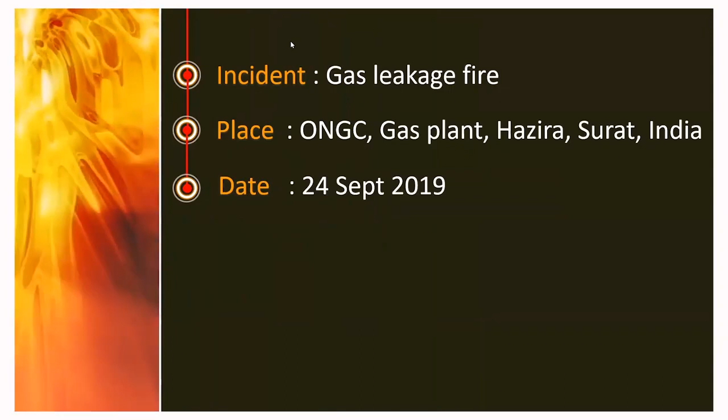It happened on 24th of September 2019 at Hazira. Basically, it was a gas leak and fire at the Hazira facility, Surat. Actually, I worked in a nearby industry for 1 year, so I am very much familiar with the place. It was on 24th of September at night, 3 a.m. There were many such news around about the incident.

So let us talk about PEAR loss. Basically, whenever we are talking about loss, we are used to using this PEAR term: people, environment, asset, and reputation. In the incident report it was not arranged like this, but we tried to map it.

People loss: what they mentioned, there is no injury or any fatality. That is good. Environment loss: they mentioned a few damaged trees, but really it was a huge release and huge dense smoke. That part was not mentioned. So here they only mentioned damage to a few trees.

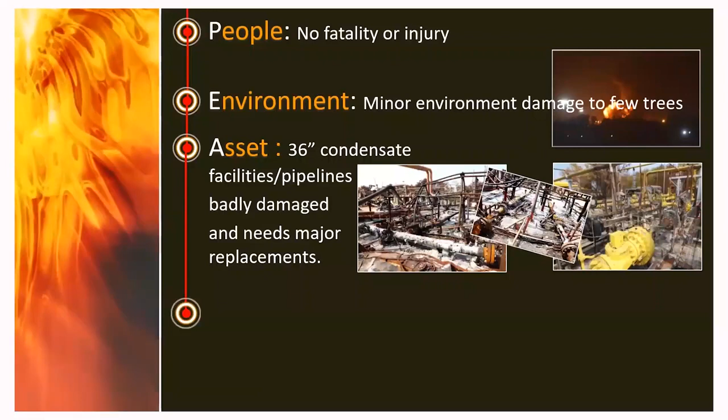Asset damage: you can see from the photograph itself, huge asset damage, production loss, this, that. But as per the report, they mentioned only the 36-inch line, one of the condensate facility lines, was badly damaged and needs replacement.

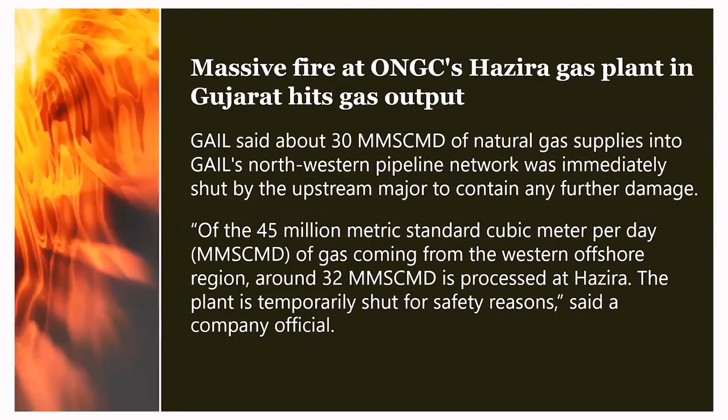Reputation: it became a news headline for all such news channels and newspapers here and there. One of the news headlines talks about 30 million metric standard cubic meters of gas supply to the northwestern region being interrupted because they shut down the plant.

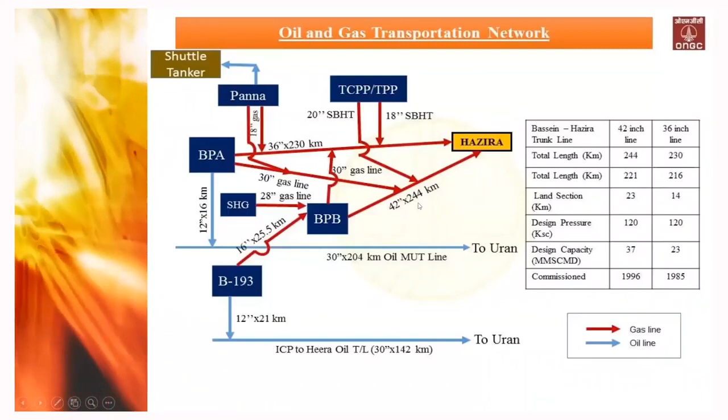Basically they were receiving gas along with condensate, and there is a huge network of such gas. One of the most important aspects: there are two lines, the 36-inch line which is around 230 kilometers long, and the 42-inch line which is around 244 kilometers, coming to the Hazira plant for processing, where the gas is processed in the gas terminal. The gas terminal is nothing but a kind of separation of gas from condensate.

The 36-inch and 42-inch lines were well designed for mixed flow of gas and liquid. In the gas terminal, it is separated through a slug catcher, and then gas is routed through various cleaning units for further distribution. And similarly, condensate is processed and routed for local customers and other finished products.

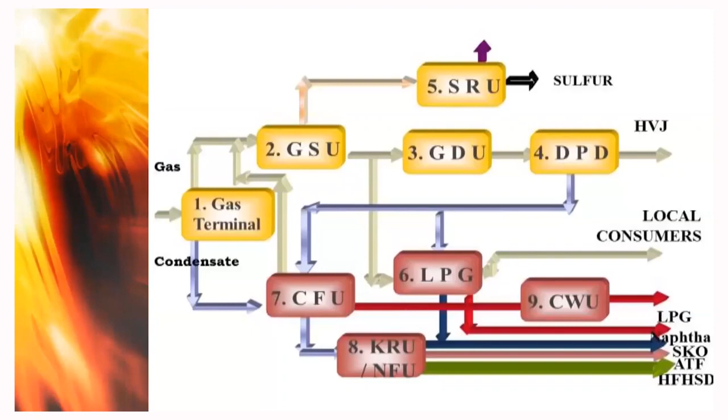We will not talk about the GSU, GDU and all because it is not of much interest, but yes, something happened to this gas terminal. So let us go through this block diagram. I tried to prepare this block diagram based on the description available in the investigation report. So here you can easily understand what is inside and outside.

There are two lines, the 36-inch line and the 42-inch line, coming to this gas terminal for separation. There are two isolation valves for each line, and the other isolation available is called the valve station. For the 36-inch line, the valve station was 1.7 kilometers away from the facility. So it is offsite, and inside there is one valve.

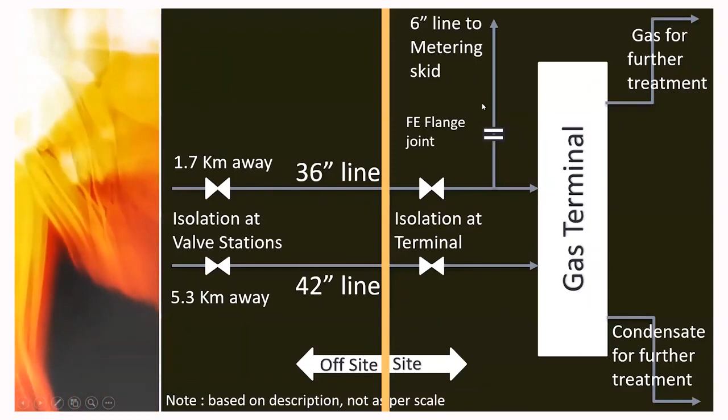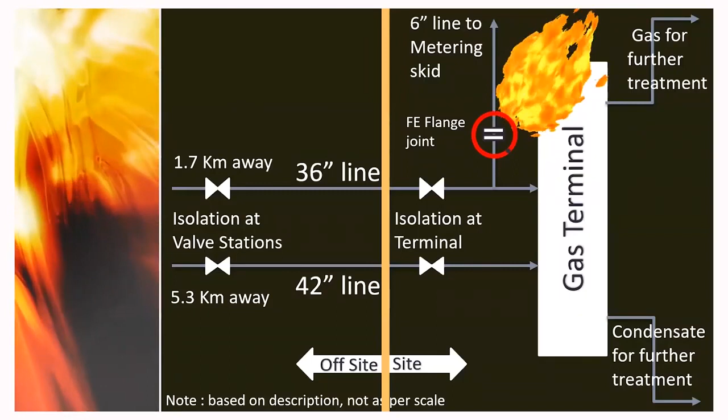Why are we talking about this valve? Because it is one of the points of interest in the discussion. After this valve, there was a connection for the metering skid 6-inch line, and particularly this flange started leaking and then there was fire. So this is the location where the actual leak and fire happened. Again, it is based on my interpretation from the description, but more or less it is matching. So this is all about plant and processes.

Let us go through the incident timeline. What happened at which time? At 2:15, one of the security guards observed noise as well as a vapor cloud from the location, and he informed the main gate control room, LPG control, various control rooms; they have a defined way of communication, so they communicated accordingly. Almost 3 minutes later, the same thing was reported by one more person, and it could also be identified through CCTV.

Around 2 minutes later, they started more communication. So all of them were now communicated. Around 3:04, one of the pressure control valves, which again I could not locate because it is not a 36-inch line valve, something controlling the downstream pressure, was closed. But this valve is not an isolation valve for the particular gas line, which we will talk about later. By almost 3:08 hours, fire took place as per the CCTV footage.

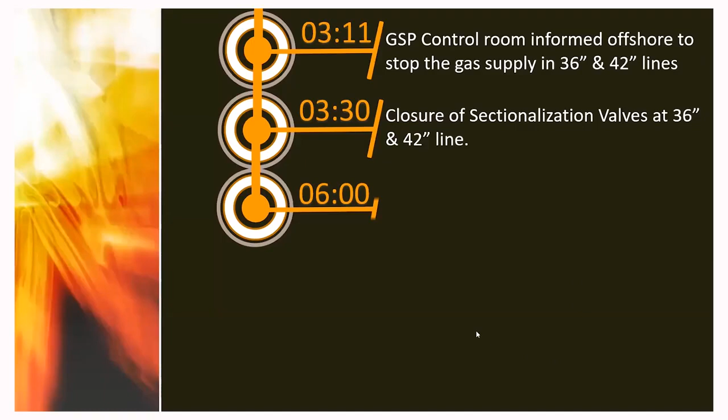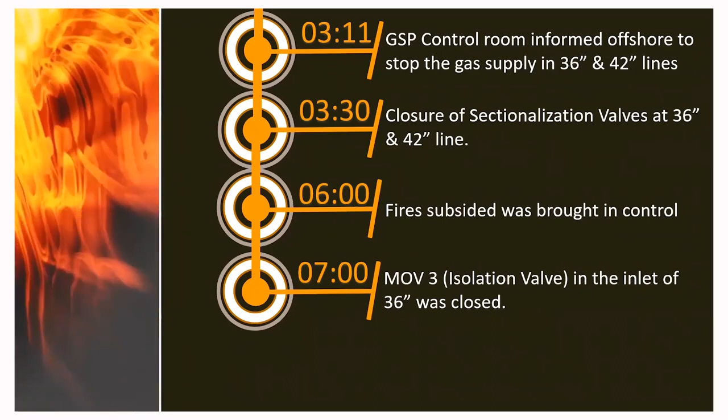At 6 o'clock, the fire was controlled, and at 7 o'clock, this particular MOV3, the main isolation valve inside the plant, was closed, because only after the fire could they assess the location and close the valve. So this was a manual valve? Yeah, rather, it was motor operated, but remote access was not there. From the control room it was not operable. It was only operable on site. And at 7:30, they declared all clear.

So this is the most interesting thing, where we can start learning from: the observations and findings by the committee. The committee categorized the observations under various titles like facilities, safety, maintenance, firefighting system, electrical maintenance, quality assurance, and all. Since we have limited time, we may not go into detail, but I have kept some important points, so we can go through those points.

So facility. Based on the facility observation, they observed things like a mismatch of drawings in the P&ID versus what was available in the field. Some of the PT and delta T transmitters were available in the P&ID, but they could not locate them in the DCS. Whether they were actually not there, or where they disappeared, is again an issue. Mismatch of time stamping: they wanted to check DCS data for the same event, but there was a mismatch of the same event from one panel to another. So again, it is a mismatch.

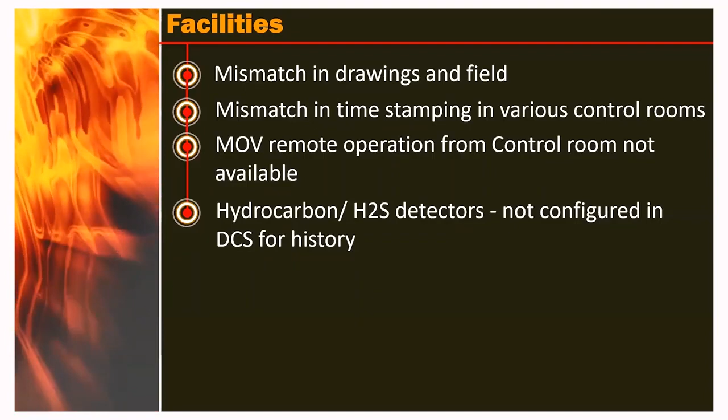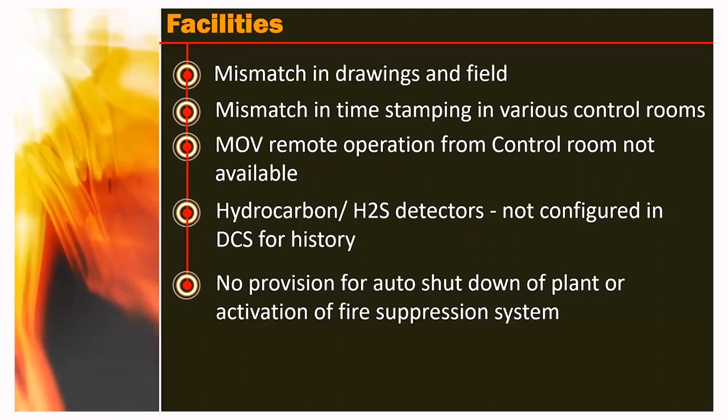MOVs, as rightly told by Mr. Rutvik, MOV remote operation from the control room was not available. Even hydrocarbon and H2S detectors were there, but the detectors were connected only to the alarm panel, not to the DCS for any kind of history. So we can think of the design aspect here. No provision for auto shutdown of the plant. This is the highest kind of design deficiency, we can say. Not even an automatic shutdown or any automatic fire suppression system. Let us quickly go through.

The next is with respect to safety. They targeted self-safety audits, internal audits, external audits, fire drills, the incident reporting system, and even the emergency response system. For the self-safety audit, the audit was done using a checklist, but the checklist items were not covered. Many of the observations were not covered even. So there is no meaning to preparing a checklist here. And there was no specific checklist for the plant. It was some very generic safety check. Yeah, it was generic.

With respect to internal audit, they identified 2 audits in 2018 and 2019, but there was no checklist. So how they were doing the audit is again a question. For the external safety audit, done in 2018, there were 308 recommendations. So from the external audit itself we can understand there was a huge gap. Out of these 308, 296 recommendations were completed. But sometimes they are just marked completed without any further action. And the balance, almost 12 observations, were still open, and the date was extended up to April 2021. So these are some of the observations.

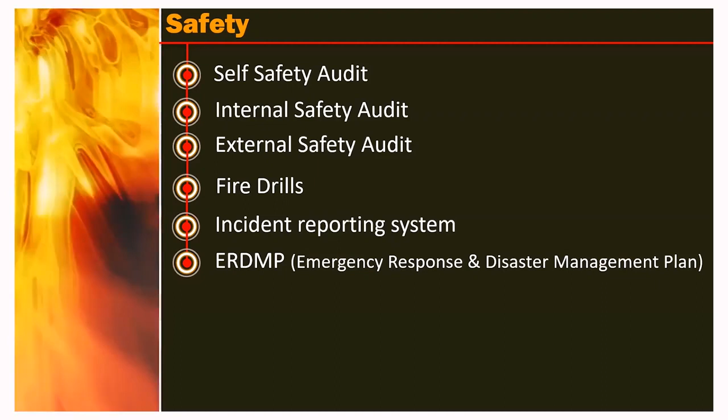They were doing isolation - the leak started at 2:15 and they were doing isolation at 3:30. So a huge gap. The very first step shall be, as we all know, to isolate the system, but they could not do it, since their emergency response plan does not talk about it.

Another finding, with respect to firefighting system - capacity was not sufficient. But again, the basis is not given for why it is sufficient or not.

Can you please mute somebody?

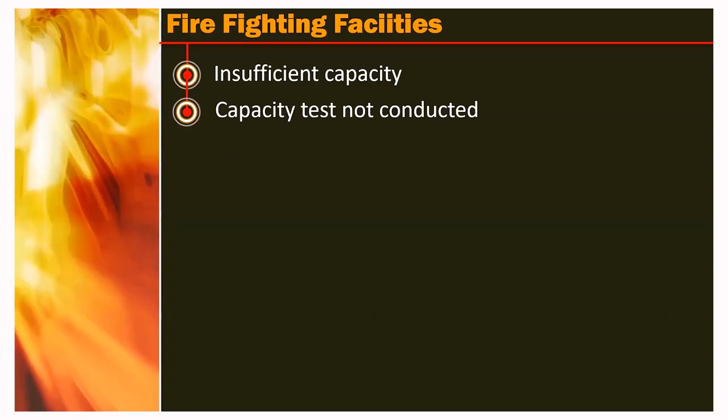Capacity test not conducted as per OISD - Oil Industry Safety Directorate - basically as per legal requirement. There is a legal kind of requirement, but they do not do capacity test, or even fuel consumption is not logged.

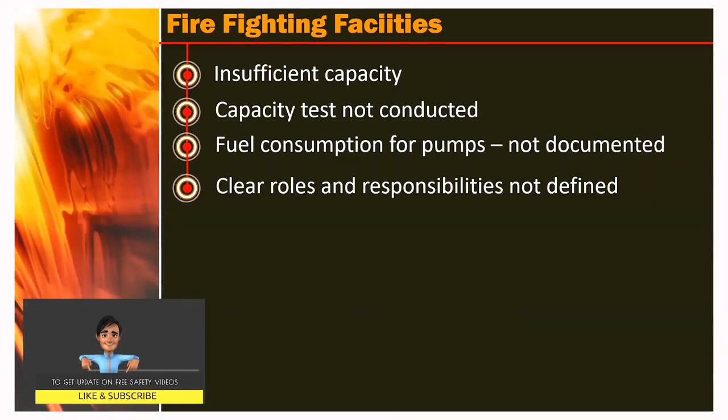Clear roles and responsibilities not defined. How can we understand - like the maintenance and operation of pump, tanks, pipeline, hydrant monitoring are carried out by various departments, like utilities, sometimes some parties by maintenance, sometimes other agencies, contractors. And how they are performing their roles and responsibilities is not monitored, functioning also not monitored.

The actual firefighting operation was by CISF, which is an outside agency, and ownership of the assets were with ONGC. Even with CISF, basically security staff.

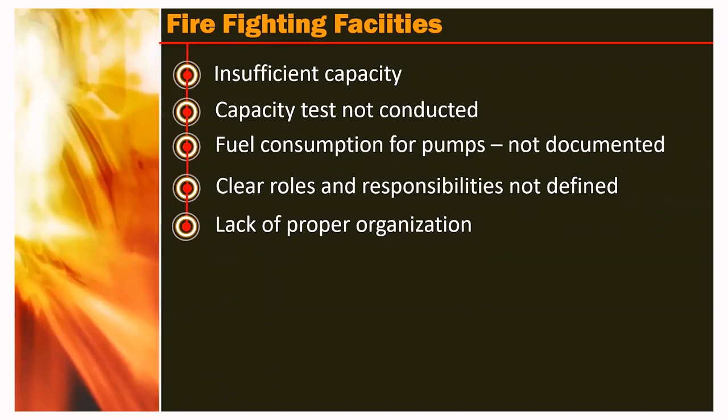How they are doing firefighting and all - again it is a question. They were carrying out such activity under guidance of fire chief, but they were reporting to shift in-charge instead of fire chief. So there is a mismanagement. There is no particular fire crew or something.

With respect to maintenance, we can speak about management of change not being followed. They mentioned one example for this particular FT we were talking about - that FT was calibrated, its calibration was changed.

It was 16,000 water column. It was changed from 16,000 to 2,500 without any management of change. After 6 months, again they changed the setting from 2,500 to 16,000. How? Why? Everything is not mentioned. So management of change was totally not followed, by this example.

Critical job management not adequate - one example they mentioned for the same FT, on 18th of September, just a few days before the incident, one notification for maintenance was generated. There was a requirement of gasket, but that gasket was not available, so they procured from local market without any specification or quality control.

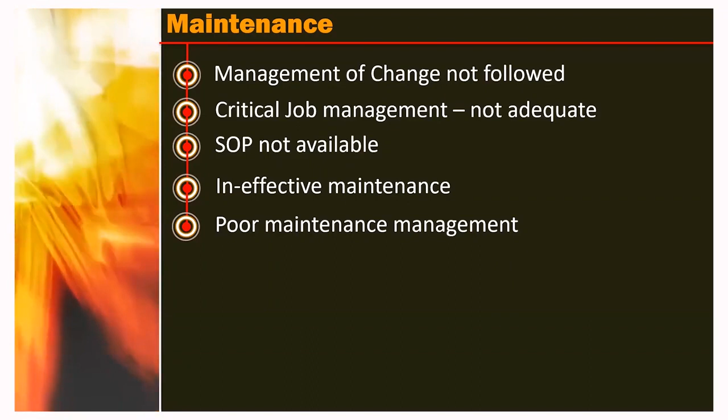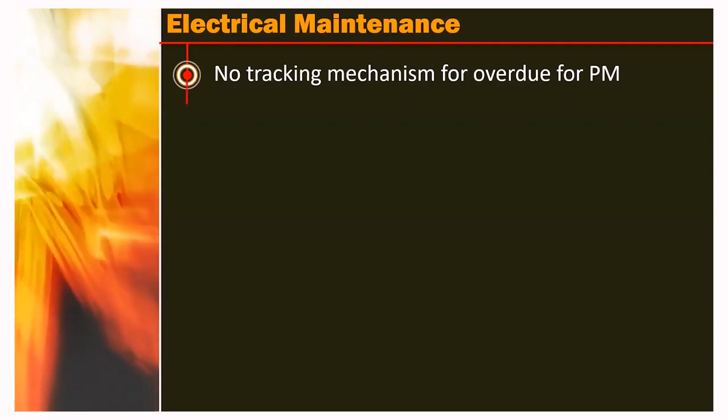What they did, how they did, there's no need to enter details, just clicking, or maybe some system closes the issue. Another point with respect to electrical: no tracking mechanism of overdue items, similarly no mechanism to check overdue, and no mechanism to record the reason for overdue. No unit identification.

This is one of the interesting items because it is relevant to our incident. They have a number of flame-proof electrical equipment like lighting junctions and all, and they do not give a unique number to that. So this is one of the gaps, because there is a chance of every time missing some item or every time repeating some item. So for preventive maintenance, it is a gap if we do not have a unit identification number.

Inadequate electrical audit. After this incident, there was an audit. Again, we can say they do not learn. After the incident, they had an electrical audit to check electrical connections and other equipment, and they generated a report which was just a generic one-page report without any detail about anything. In particular, one of the lamps was found damaged, which was the cause of the ignition source, but they did not mention detail about this particular lamp.

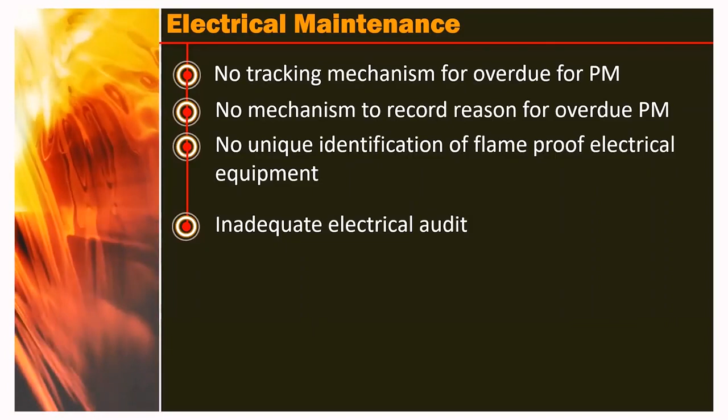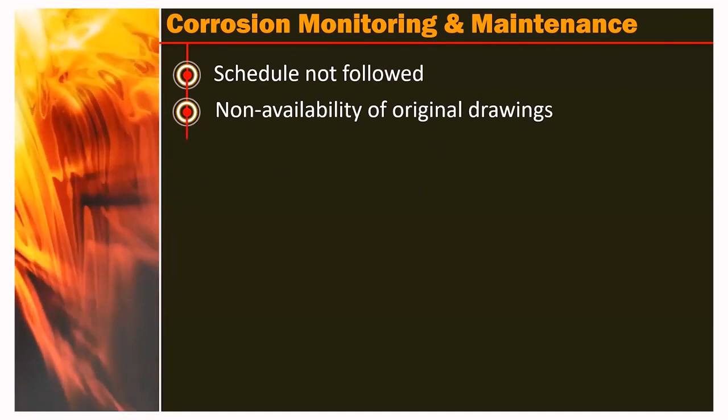With respect to corrosion monitoring and maintenance, the schedule was not followed, and there was non-availability of original drawings. There were many such issues, including no procedure for selection of thickness survey spots. So there is a case that a particular line may not be checked because there is no procedure on how to select the spot, and there are chances that one spot is checked every time while some spots are not checked at all.

No action or insufficient action on monitoring. Basically, what they mentioned is that in 2000 they had a schedule to do monitoring every 4 years, but they did not follow it. They did one survey in 2011 and the next survey in 2017. So there is a gap.

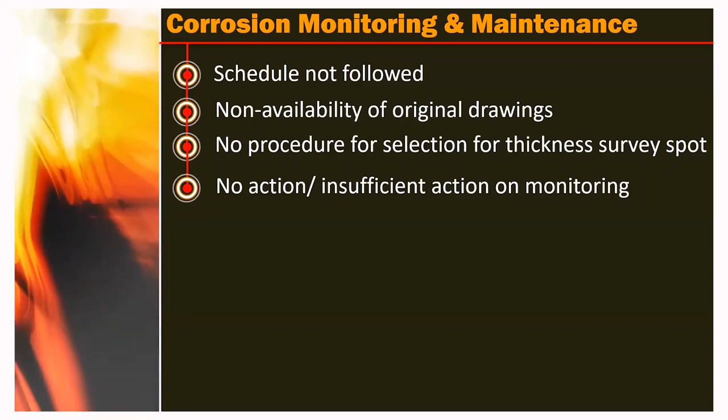In one of the surveys they identified various thickness losses, but they did not do anything about it, no action on such items. At one of the thickness survey reduction points, what they did was apply coating - not even coating, just paint. Whether painting of a pipe is sufficient as a corrective action for thickness reduction is again a question.

Some general observations they could identify: lack of proper design of the control room. The newly designed control room was supposed to be blast resistant, but the doors were not blast proof. So this shows improper design.

Inadequate training and competency - we can easily identify that CISF security personnel were performing the job of firefighters. Inadequate training was clearly mentioned with respect to safety, operation, control room handling, logbook writing, and what to do in case of emergency - none of this was managed. People were not trained. What they mentioned is a 4-day training program for new recruits, and after that, no training. Whether that is sufficient, we can easily understand.

Even the qualification of staff is not mentioned in HR as well as operation policy. One more observation with respect to training: most of the staff attended their last training in 2018, and after that, no training - so 3 years without training.

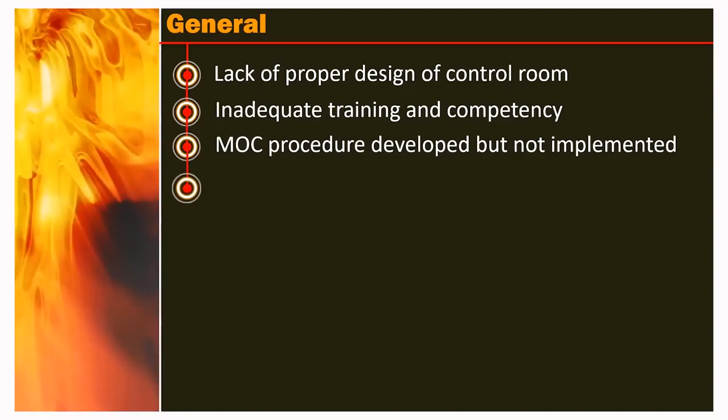MOC procedure was developed in August 2016. They developed the procedure, but it was not rolled out. So without rolling it out, how will people come to know there is a procedure and that they need to follow it?

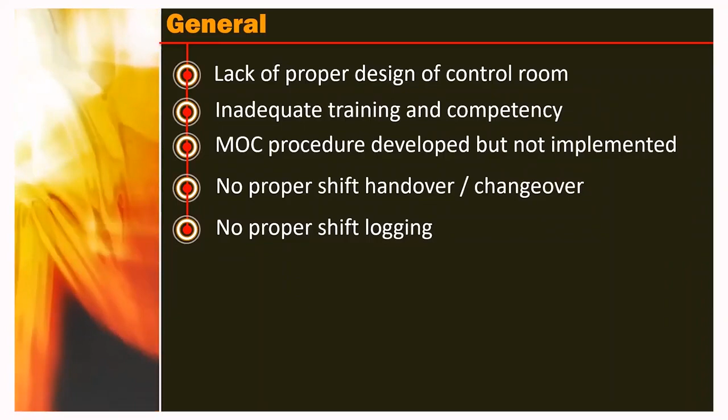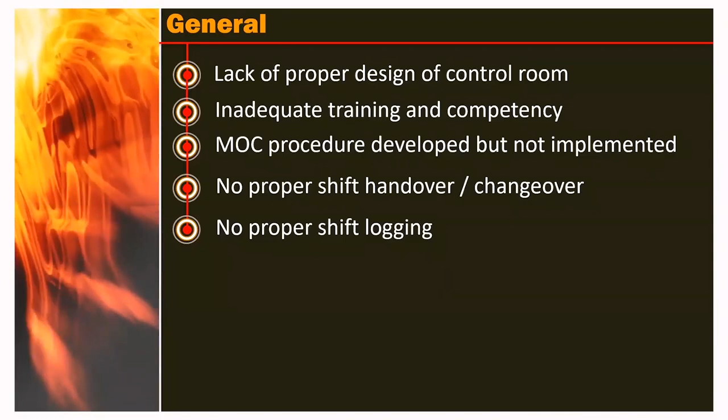No proper shift handover changeover. People are writing logs in just a makeshift arrangement register. They were not even entering activities, any events, or any alarms, and handing over/takeover procedure is also not in place. So these were all the observations.

Due to lack of time, we are just running through the observations. So now let us move to what were the immediate causes and then the root causes.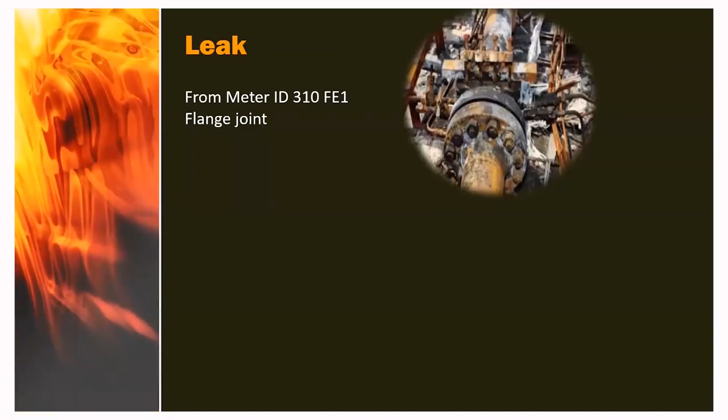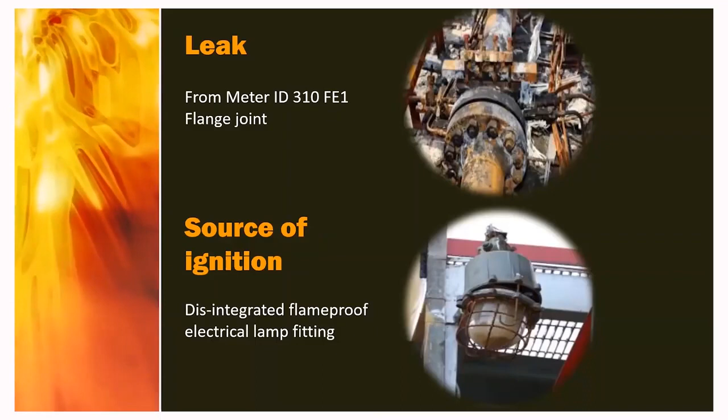Another aspect is the source of ignition, which was one of the disintegrated flame-proof electrical lamps. What they observed may not be part of the preventive maintenance program, because of lack of unit identification number.

Root causes, yes, what they mentioned as root cause is again a point of discussion, and Mr. Ujjwal Ritik will focus more on the report.

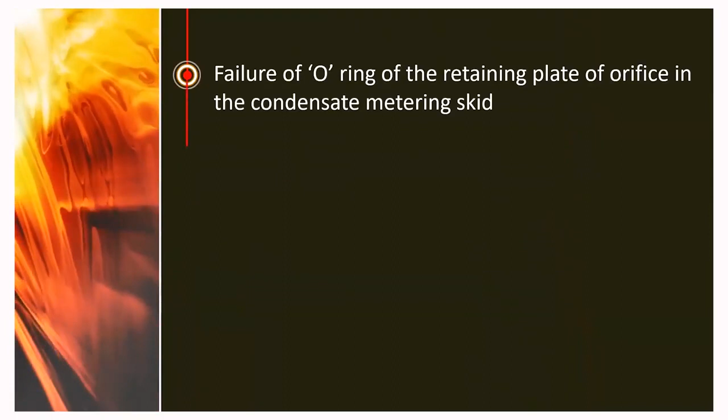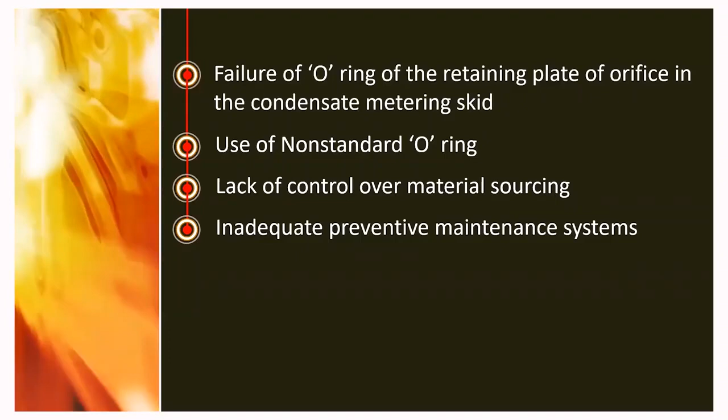Failure of o-ring and failure of the flange metering gasket, use of non-standard o-ring, lack of control over material sourcing because they are just doing local purchasing with no control over that. Inadequate preventive maintenance system, which we already discussed in detail. Non-isolation and stoppage is also one of the issues. They closed the valve at the valve station at 3:30, and even after extinguishing the fire, they could not stop the leak at the local isolation point.

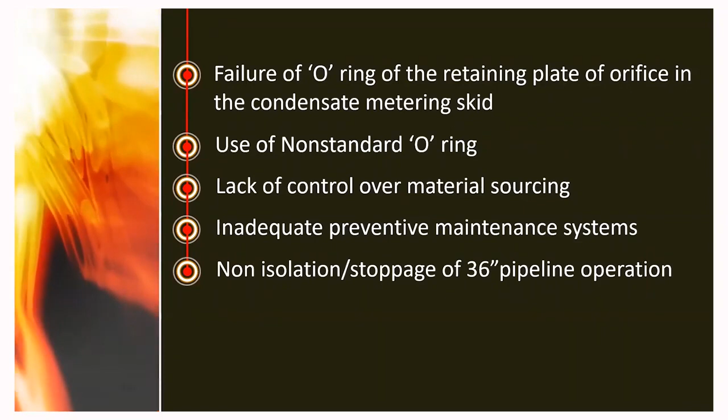Committee recommendations - we will not talk much in detail here, because whatever observations they could identify, they were giving line-to-line recommendations, like for example they mentioned that all P&IDs should be checked.

First of all, we much appreciate the efforts made by ONGC, and particularly the Petroleum and Natural Gas Regulatory Board, that they have instituted such a process of independent inquiry - I mean relatively independent inquiry, I should say - and the report has been put in the public domain.

But one thing that strikes me is that the intention of the report is not very clear. They are talking about one intention being that this incident does not happen again, but they are not specific about where it should not happen - in that same plant, similar plants, ONGC, or oil and gas and hydrocarbon facilities across India, because there are hundreds of such facilities under the Petroleum Regulatory Board. If that intention is not clear, then who this report is meant for is not pointed out, and therefore who will learn from this is also questionable.

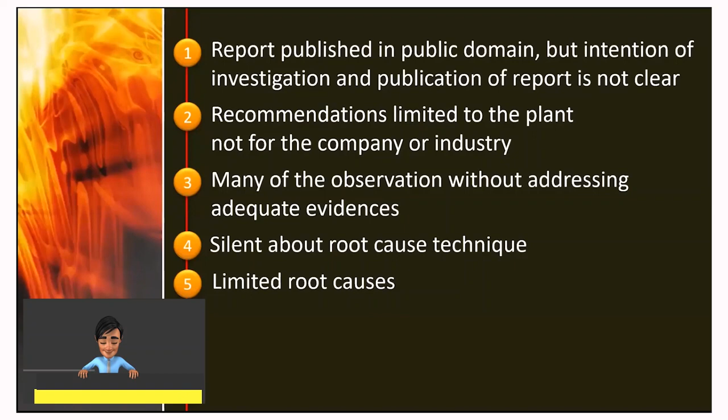Possibly they should have gone beyond as to why there were so many asset integrity failures in this whole facility. And a bigger question to ask is: is there a similar situation all across ONGC facilities, all across petroleum and natural gas facilities across the country, that they are in violation of so many OISD requirements? And who was auditing, who was monitoring, why was it like this? They have to go beyond.

And as we say, even a simple 5 why technique could have given a better value to the whole effort. But what we find here, in the name of technique, they have written that the 3 investigators did brainstorming. Now, just brainstorming cannot lead you to a good root cause analysis. And if the root cause analysis is not good, the solutions also cannot come. Lasting solutions may not be possible.

They are completely silent about previous incidents that took place in that region, in that area, in that facility, across the facilities. Completely silent about asset loss, production loss, business interruption loss. Okay, I understand that maybe this is a facility of strategic importance and they don't want to talk about loss in terms of rupees or dollars or things like that.

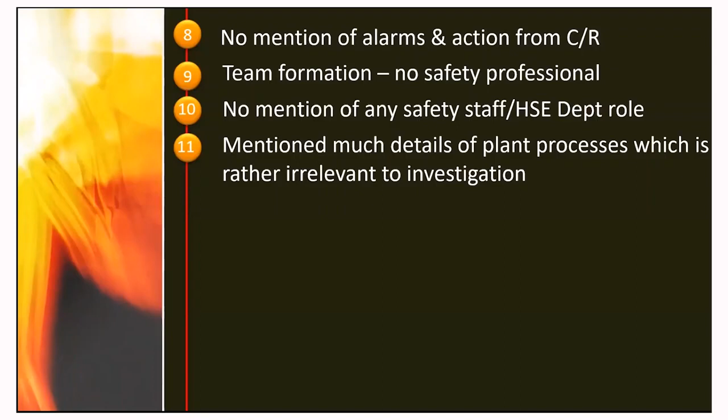And funnily enough, to the extent I could study the report, they had not mentioned much about the location, the skid, the 8-inch line, the 6-inch line, the location of the flow element, orifice, all such things. It's not there altogether in the report. In that way, it is very difficult to even follow the report because it is not there in the report.

No investigation about noise heard by security. The first paragraph of the report says that a security person heard a noise. But when you get into the detail, observations, root causes, you don't find anything about that noise which was heard at the beginning, at 2:15 or so in the morning.

Now, they got abundantly lucky that possibly there was no explosion. Just imagine a hydrocarbon leak, high pressure liquid hydrocarbon coming out from the condensate line, and we have seen the video footage that there is so much of leak around. They are abundantly lucky that there was no explosion.

But again, that's questionable. We have shown you initially a newspaper clip, I think it was from Hindustan Times or some other news agency. 3 explosions were heard by the public. They are not talking about within the plant, they are talking about the public, and the public heard 3 loud explosion noises. The whole report is completely silent about that. In fact, as I told, nothing is mentioned about the noises heard. And as we know, in any investigation, noise counts.

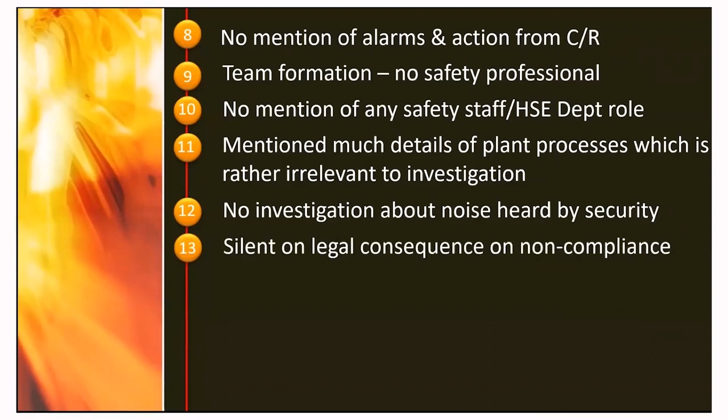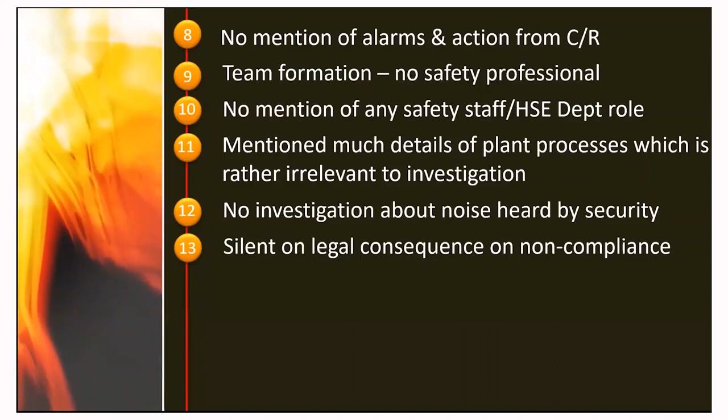Silent on legal consequences on non-compliances. What OISD norms, what petroleum regulation norms were violated, nothing; the whole thing is completely silent about the legal, techno-legal aspect of the situation. Attempted to search leak in vapor cloud. They have talked about some people who attempted to search for the leak, but I don't know if it was the right decision on their part. Nothing is discussed on these lines.

Used many acronyms and full forms are not mentioned anywhere in the report. So unless you are fully familiar with the plant, the system, the organization, the various terms and abbreviations they are using, it becomes very difficult for an outside reader to follow the report and make sense of it in its full meaning.

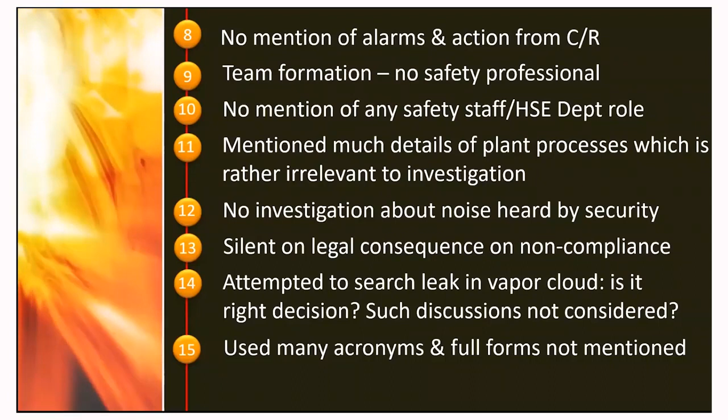Now, my small submission is that, yes, I fully appreciate the work done by the committee. They have done their work, but as I told, whatever efforts they have put, it has been devalued by the process that they follow. The whole process, getting into the incident, investigating the incident and making it public in the public domain by PNGRB, is very much appreciated. But again, there is much to be done.

In fact, this regulatory board has a lot of work to do. I cannot get into further detail, although there is much to be said. Questions are raised. Only 7 incidents reported since 2016. Anyone who has any idea about the hydrocarbon industry in India will look at it with much doubt. Only 7 incidents since July 2016 until March 2021 or January 2021. It's kind of difficult to accept.

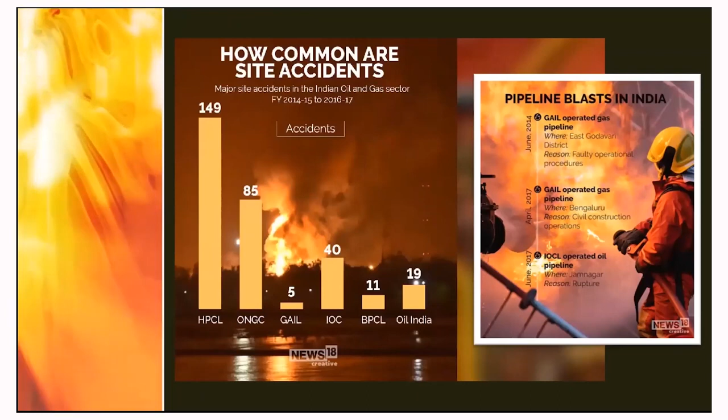How the lessons were learned by ONGC, the whole report does not talk about what lessons ONGC as a company must learn. And how the lessons were learned by the Petroleum and Natural Gas Regulatory Board or the industry as a whole is very difficult to gauge. Incidents are common. Pipeline incidents are common. I have just collected some media reports. They may or may not be correct, but at least it gives a flavor that we are much beyond what is actually shown on the PNGRB website.

So, in conclusion, some of the lessons were not learned, or possibly, as you look where you are, many of the lessons were not learned. In spite of this effort, accidents keep occurring, lessons are not learned, and there is a need for improvement in the investigation process and the competency of investigators.

Again, I don't want to say for a moment that these 3 people who investigated were by any means less competent or insufficient, but the report goes against them, not so much in their favor. So, lost opportunities for learning. There was an incident that, within the industry, within the country, outside the country, students like us would have learned from, but we could not.